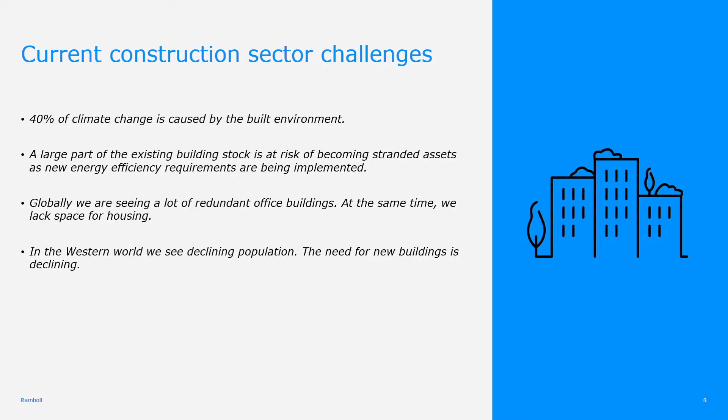We know that a large part of our existing building stock is at risk of becoming stranded assets. That's because there are new energy requirements. So if you are investing in a building that doesn't meet the new requirements, it might not be worth a lot in a few years. So that's why it's a stranded asset.

We also see that after COVID, there has been a lack of demand for new office space. People are working more from home, and in some parts of the world, in New York City for example, more than 20% of office space is vacant. So what do you do with all this vacant space?

And finally, we see that actually in most of the world, and especially in the western part of the world, population is declining. So that also means we should consider how many new buildings we actually need in the long run.

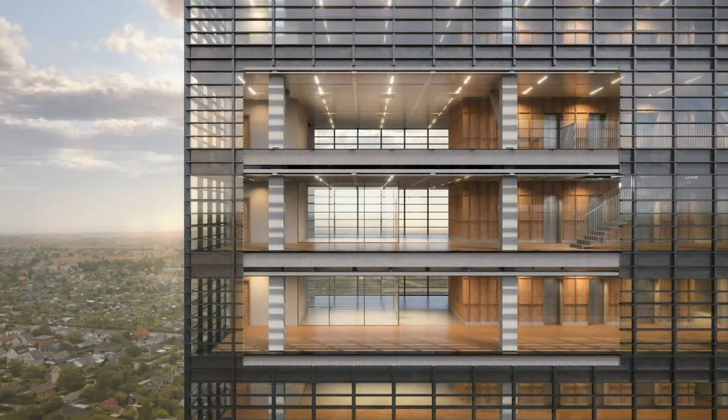We modernized all the surfaces, because after 20 years a building will be a little bit worn down. But then the other thing is the energy consumption. How do you do that? How do you track the carbon and make sure that you are on a net zero curve towards zero carbon?

The thing here is that basically you need the data. You need to understand how energy is used, where does energy go in the building? Because it's a relatively new building, we had all the data going back 20 years.

We harvested a lot of data, and we actually applied a lot of analysis. We had hundreds of things we could do based on the data to save energy, and we visualized all of these different energy consumers in the building, and at the end we came up with a few highlights.

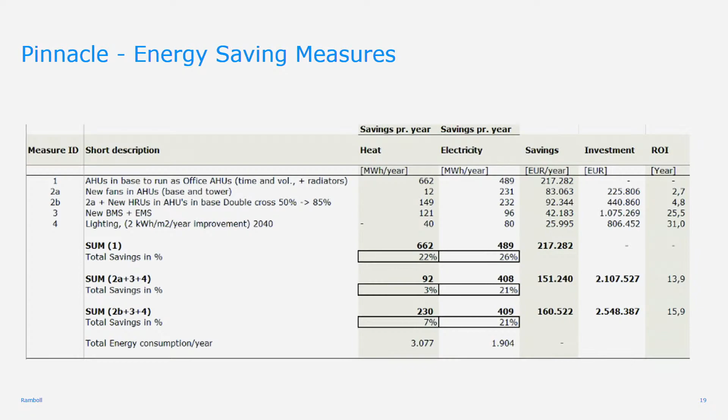These are the things you can do to save energy that can also be financially viable, which we presented as different options to the clients. And at the end, we came up with a plan to reduce the energy consumption by a third, so to 70% rather than 100%.

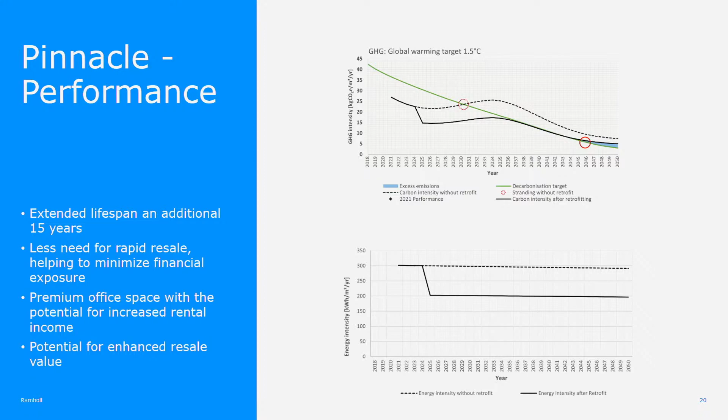We also showed the clients how they can minimize the CO2 emissions from the energy being spent, to stay below the CRREM curve and make sure the building does not become a stranded asset. A stranded asset is when the building doesn't meet regulation, so you won't be able to sell it, or sometimes rent it out to companies committed to, for example, science-based targets. This is a very important way to keep a building on the market and keep its value.

And again, it was viable, so it was paying off with these investments.

The other project I want to talk about is in London. Again, it's a building, called 8 Canada Square. It's a building from 2001, designed by Foster and Partners at the time.

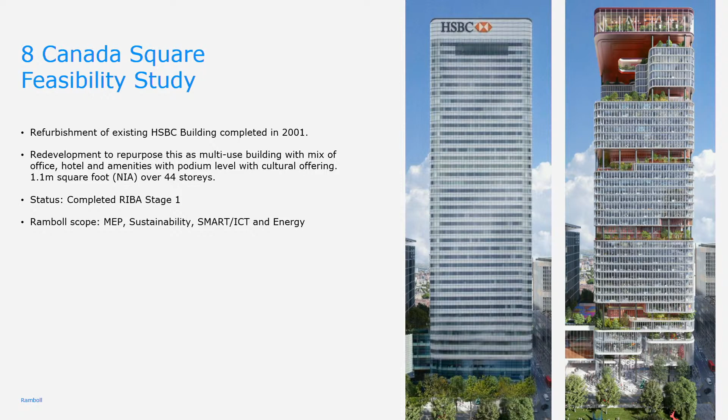And the problem here, again, is that HSBC moved out, or will move out of the building. They've been there for 20 years, but they found the building no longer meets modern requirements. They wanted to move to a new building, and they also took some of their staff from London to Birmingham. So what do you do when you have a building that seemingly is old-fashioned?

We were hired by the clients to do different things. First of all, we looked at what can be done to make sure the building meets the minimum energy efficiency standards applied to buildings in London. At the time, there was also a requirement to meet certain energy efficiency standards.

If you have an office building you want to rent out in London, you have to meet standard C by, I believe, 2028, and then B by 2030. Otherwise, you are not allowed to rent it out.

The other thing we did was, after defining a brief, the client ran an architecture competition, inviting architects to propose what could be done with this building. We acted as technical support and advised the client. When the architect was selected, the winner was KPF Architects, and they came up with concepts.

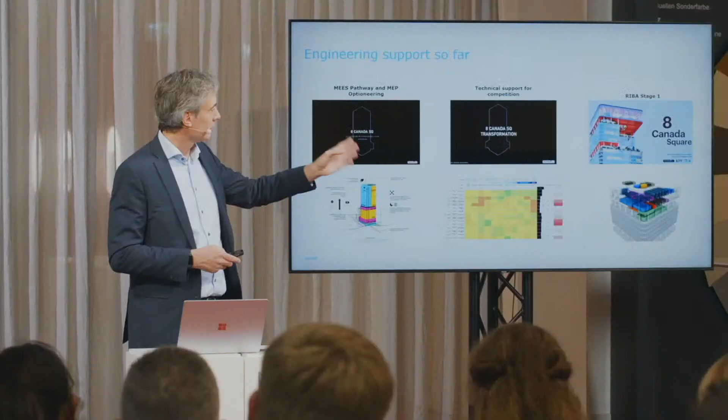We supported the architect and developed the RIBA Stage 1 report. The basic vision here was that there are hundreds of these buildings around the world, in New York first of all, but in all major cities. How can you transform these 20, 30, 40-year-old buildings into new, attractive assets?

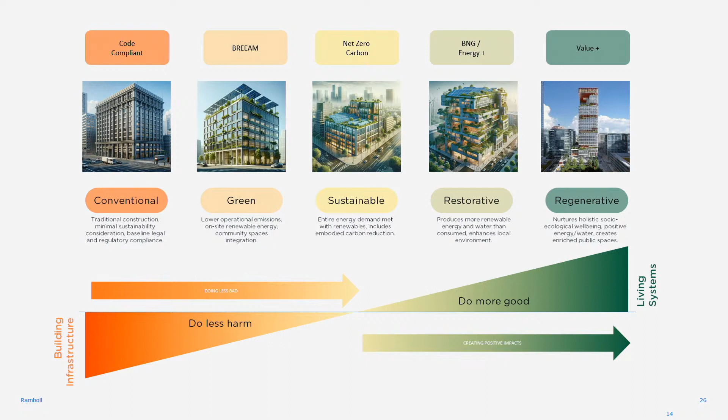What is the blueprint of a sustainable transformation? Our ambition, as in the curve you've probably seen before, is to go from conventional building methods to green, to sustainable, then to restorative or regenerative. So how can we move these buildings as much as possible towards not only sustainable but regenerative operations? That was the challenge, and we set very ambitious targets to improve on many of these goals from what they were before.

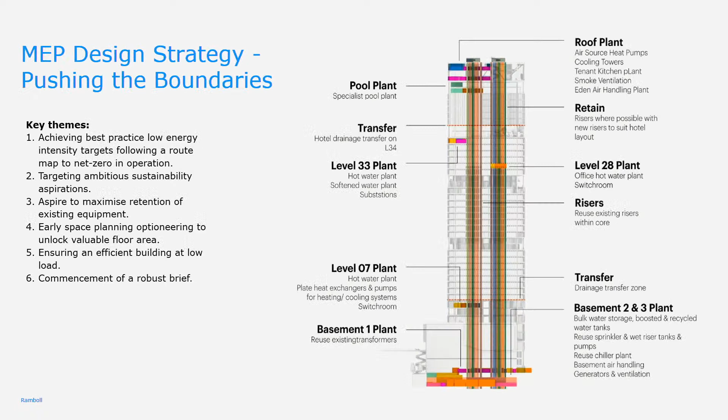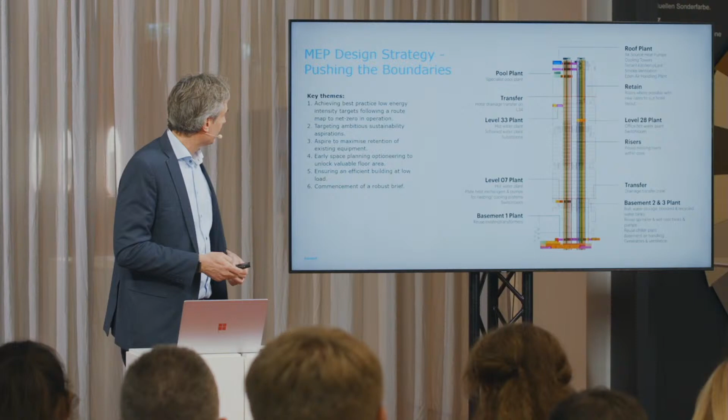We went through all of the things you can imagine and analyzed them. How can you achieve best practice energy intensity targets? We also took a look at the existing infrastructure, and the question is, of course, how much can you keep? How much has a lifetime for another 20 years, and how much do you need to replace?

All of that was combined into a report and a concept. For example, with the facades, we found out that we can keep the frames, but the glass panes need to change to improve energy efficiency. We don't have to change the frames—they can last for many more decades, and it would be too costly, also from a CO2 perspective, to change them. So in the end, a lot of things, including a lot of the mechanical and electrical systems, will be kept.

This is why one of the options we investigated, turning it all into housing, was not selected, because that would mean everything needed to be replaced except the structure. But we maintained a lot of it as offices, and the top part was turned into a hotel, making it mixed use.

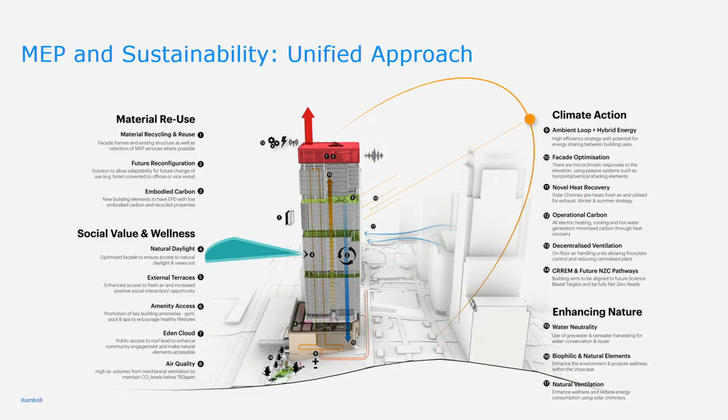We introduced these terraces so that people can go outside rather than stay inside a glass building the whole day, so they can go outside more easily. This also helps prolong the lifetime of existing buildings, making sure we don't have to demolish and build new, because that has too big an impact on the climate. Thank you very much.

Thank you very much, very interesting. What I think is special is that we now have phrases and words which didn't exist before, at least not in this context—stranded asset, transforming buildings. I think three, four, five years ago everybody was keen on building new buildings, and now we are talking about transforming buildings.

What would you say is the percentage in your building sector at Ramboll? I assume it is increasing, but is it a serious number already, and where's the end of the road?

It depends a little bit on the market, but there's definitely a lot more renovation and refurbishment at the moment than there was a few years ago, and I think everybody's considering maintaining buildings. I think the most radical example, or extreme, is in London. We've seen lots of new opportunities there in the last year, and maybe 80 to 90% of the projects that come out for tender are renovation projects—only a few new buildings come out here and there.

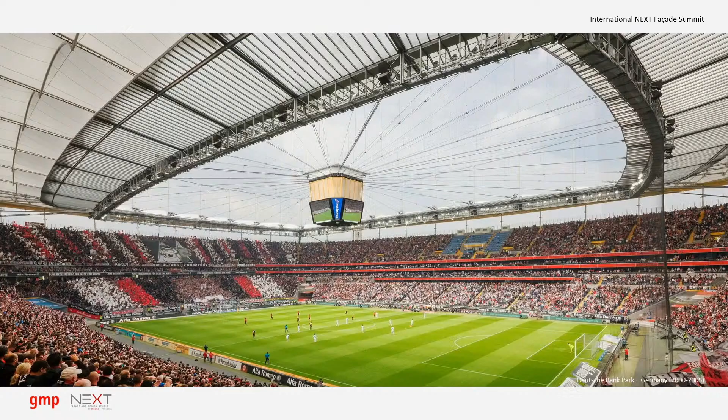We work all over the world. We have some offices in China as well. This is China National Museum, and this is two high-rise towers we did in Guangzhou. And another office we have is in Vietnam. This is Vietnam National Museum. Just as a brief introduction to what we do, we are now over 550 employees with 50 nationalities spread over 7 offices, and we've had the pleasure to have now 500 of the projects actually built.

Today I'm not going to explain other types of projects. I've been involved in sports architecture now for almost 15 years. This is a selection of the stadiums that we've been doing. Just to run you through a little bit, my passion and what I find so fascinating about stadiums is that they combine many different things: it's about personal memories of people who as kids went to see a match, but also a history of a culture, a history of a nation.

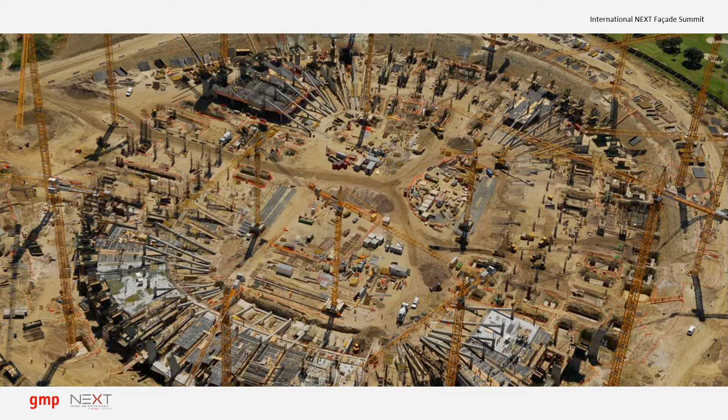Another part which is always kind of scary is seeing the real scale of stadiums when they start to be built. Because we work in a digital world with plans and screens, but once you go to construction sites and see 3,000, 4,000, 5,000 people building the things you've been working on, it's always a very impressive moment. The scale, size and complexity is always a combination of many people working together, usually from all over the world.

This is an image from the first stadium I worked on, in the middle of the Amazon rainforest in Manaus. Manaus was the host city chosen by the Brazilian government to represent that impressive rainforest. It's 1,200 kilometers upriver. The steel structure was fabricated and pre-assembled in Portugal, put on an ocean-worthy ship, and sailed straight up to the Amazon rainforest, where it was assembled. This was the final result.

The architecture represents a basket that local Indian communities use to go into the forest and collect fruits and everything they need. Of course, if the basket is the stadium, then the people inside are the fruit—but that's where the analogy ends.

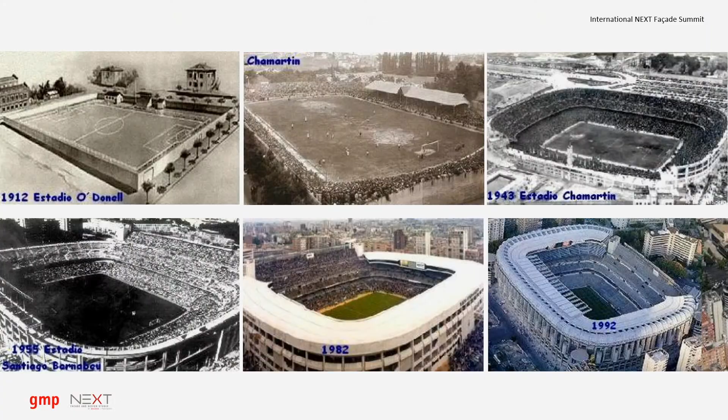Real Madrid started as a very small club more than 100 years ago, on the outskirts of Madrid. As the club grew, so did the city, and at some point the stadium ended up located on the main avenue, the financial district of Madrid. But the stadium no longer had the architectural feeling or design that matched a club that considers itself, perhaps objectively, one of the best clubs in the world.

The challenge for the design competition we won was to design a stadium in line with the ambition of the club, one that represents it as one of the best clubs ever in football history.

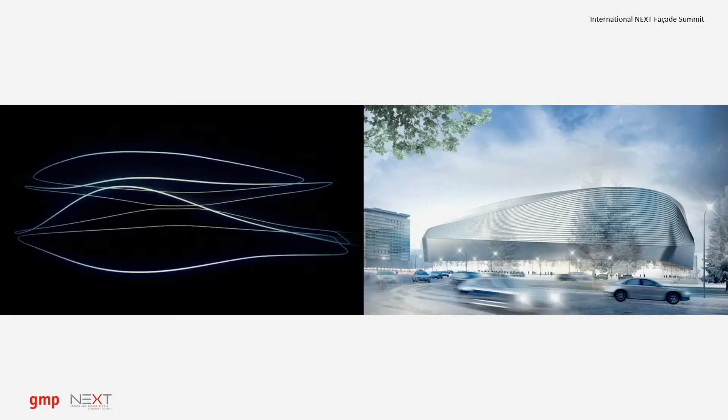We worked on this together with 2 local architecture firms in Spain. In all the stadiums we do, it's never just us—it's always an interaction between many different firms, especially local architects.

What we were able to do is not only transform the stadium but also transform the surroundings. We created public squares of around 12,000 square meters, which doesn't sound like a lot, but this is in the heart of Madrid—new public spaces directly linked because of the redesign of the stadium.

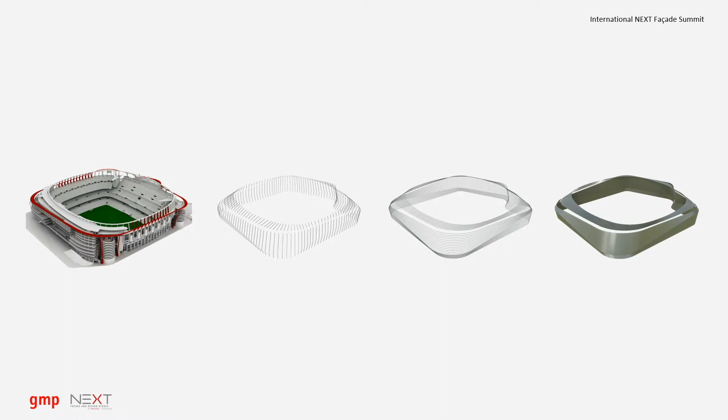There are around 100 vertical ribs hanging from those mega trusses, then 38 lines of horizontal elements going around that create this geometry. These are then cladded with stainless steel and aluminium panels, each with their own geometry. This was all developed in 3D and fully parameterized. Interestingly, we worked very closely with the industry, and they used the same models for fabrication as we had been developing for the design.

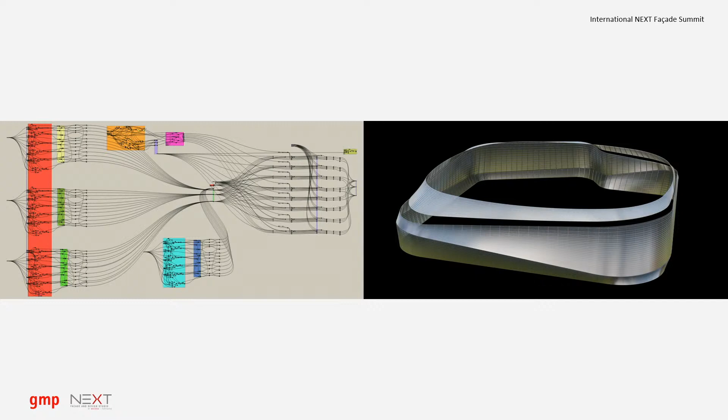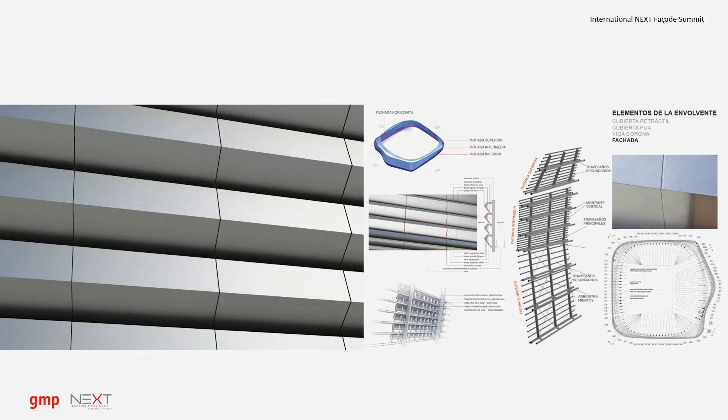And this is a close-up from the design documentation. So each of the louvers has two layers, let's say. One is facing slightly upwards, and one is facing slightly downwards. And that gives a really fantastic effect, because there's always one which is more illuminated than the other. This also helps to establish this three-dimensional view around the stadium.

During daytime, the upper parts reflect the skies, and they actually reflect the bluish tones or the beige tones of the buildings, and the lower parts are darker. At night, when the city lights up, the lower part lights up more and reflects more, and the upper part becomes darker.

They span more or less 4 meters, and they vary in height—sometimes 60 centimeters high, sometimes 1.20 meters.

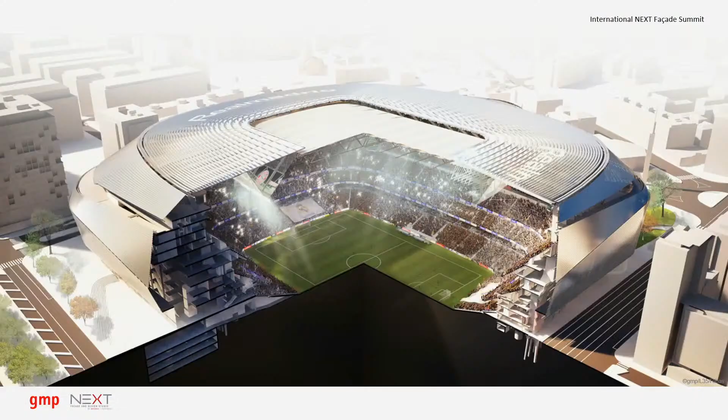And this creates actually 2 different types of spaces that are added to the stadium, which the club didn't have before. One is a space in between the old concrete structure with the tiers and this new element, which we use for bars, for lounges, for skyboxes. There is a museum inside that is part of the tour, and there is a shopping mall inside, and all of these elements are directly related to the space that the stadium occupies in relation to the city.

So the museum is on the main entrance side, which is here, Castellana. The shopping mall is on the back side, where the old shopping mall used to be, etc.

The second space, which is very fascinating, is this sort of slit which you see running on top. This is what we call the skywalk, and it will be part of the stadium tours, and also different kinds of events can be held there.

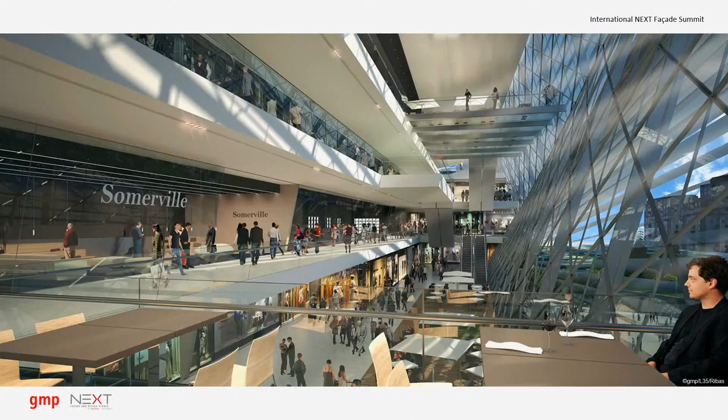You have a fantastic view over the city, because it's really, really high up—you can also see the pitch, so it's a very fascinating space, which now the club is using actively. This is an image during the early design stages of how this space between the new facade and the old building can be used for different types of elements.

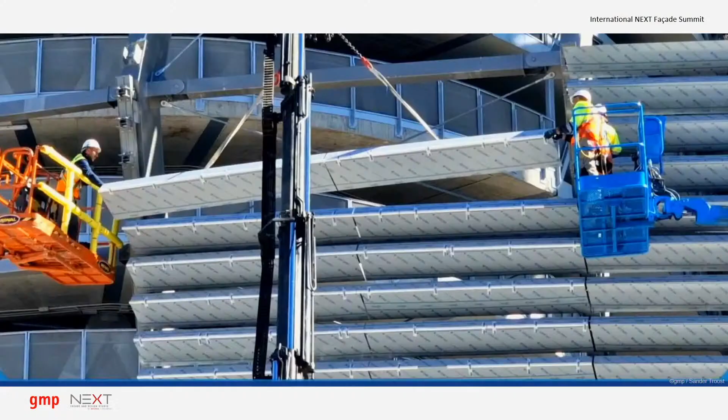Again, each individual louver is a singular piece. They were all prefabricated in the north of Spain, and they came in sequence to the construction site. So the level of precision needed to be absolutely accurate, and this is what we did together again with the industry, the construction firm, and everybody involved, because there's no single element the same. So they needed to be there in time, accompanying the construction sequence. And the material is stainless steel.

It's a linen milled element, and this gives the tones, the different colors that the stadium has, based on what the stadium reflects to a certain extent. There was massive research done by our team to find the right material with the right level of reflection, the right intensity, the right tone, seeing the stadium reflecting the city and interacting in that way. Those louvers are sometimes more open when there's a visual connection to the city, sometimes more closed to protect either the stadium or the surroundings from each other. So they create this display, but the color, the material, the texture was extremely important, and the whole design is based on those premises.

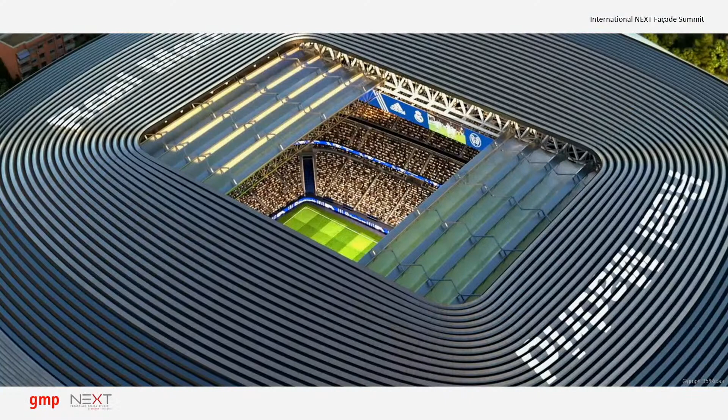Of course, the best club in the world, the best stadium in the world. So we have a retractable roof which can cover the pitch, and this also allows for other types of events. We thought they would use it more for concerts and other events, but now they ask UEFA if they can close the roof because the sound inside gets so much more intense. So for the most critical matches, they try to convince people to close the roof to support the team to win their matches.

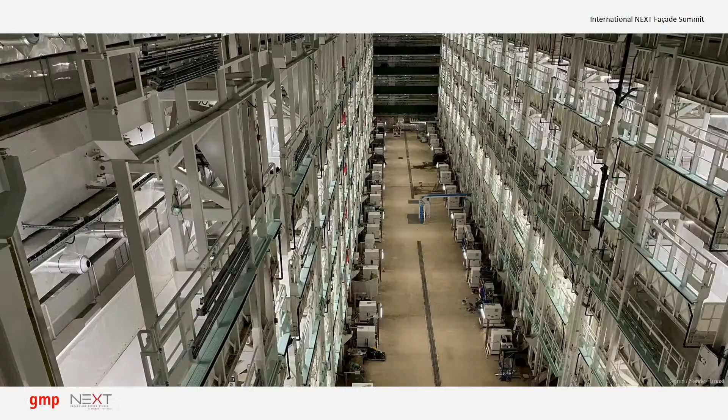Retractable pitches are nothing new in stadium design, many stadiums have them - Gelsenkirchen, Schalke has a retractable pitch. The interesting part here is there's no space to transport the pitch to. So what the club decided is to intersect the pitch into 7 segments, and they all go down around 40 meters deep into an underground parking level. Each pitch element spans around 100 meters because they couldn't use the short side - there's actually a metro running right below the field of play. So this is around 100 meters in length, what you see here.

Every pitch element has the full infrastructure for the grass of the element below to grow - grow lights, irrigation, ventilation. Ventilation is the most critical part for pitches to grow. The philosophy, and it's actually true, is that in this condition you can perfectly control the whole environment. If pitches are outside in stadiums, it's always very difficult because there's a lot of shadow, not a lot of sun, and you need grow lights anyway. So the vision here is, let's make a greenhouse. I'm from the Netherlands, we grow tomatoes in greenhouses - I know here in Germany those tomatoes aren't considered the best tasting ones, but they grow. So the idea is you could use the same technology for the grass, and that's what they did.

The stadium now is really a multifunctional arena. Before it was mainly football, now it also hosts concerts - Taylor Swift was there earlier this year. This also proposes a very nice challenge to stadiums in general because the public is completely different. A football match has a certain demographic cross-section; if you invite Taylor Swift, the public is completely different. You need to cater for that in terms of toilets, food and beverages, safety, access, etc. So we were very happy to see this is now really happening and taking place, and of course for the club this is also a great way to generate extra revenue.

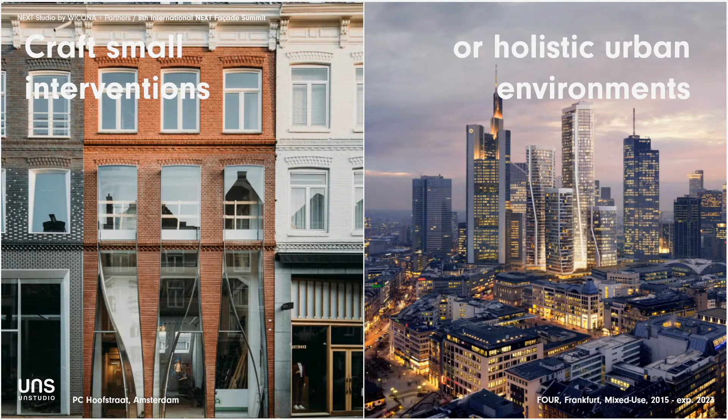Thinking about the life cycle of buildings and what buildings can mean in the future, we always try to anticipate what the legacy will be, looking back. How is the future looking at us being here today? We have seen examples extending the lifespan of a stadium by many years, but if we discuss a lifespan of 20 years for a building, that's quite ridiculous. There have been mistakes made in the past, which we now try to avoid.

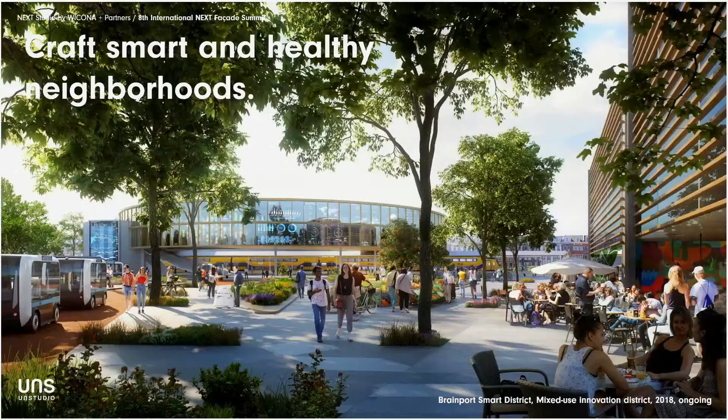So we think in terms of healthy, smart neighborhoods. How can we really bring things together? How can we share the knowledge and benefit of this together? Really focusing on communities and also looking at other possibilities out of the box.

So what am I going to show today? I brought three projects: the tall one, the large one—which is a large inner city development for Amsterdam, the Booking.com campus—and last but not least, the small one, which is the Echo project at TU Delft.

My Portuguese is really bad, Sander, so maybe you want to correct me, but it's called Parque da Cidade. I don't know if that's okay, but let's call it PDC for now. Maybe that's easier.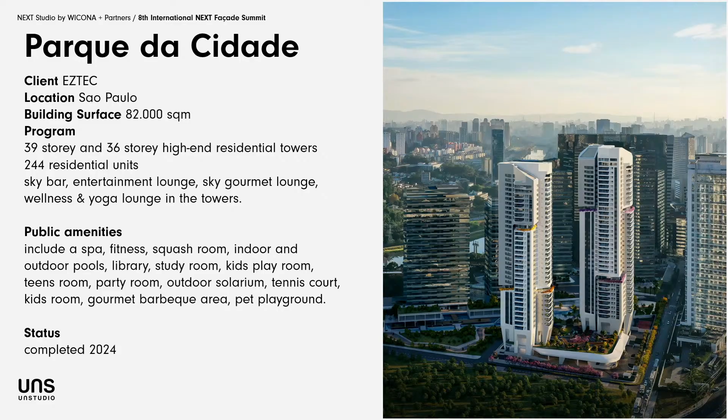So it's a residential project in Sao Paulo, about 82,000 square meters, with 2 high-rises, whereby the amenity level introduced in this development is about 30%. So 30% of the overall area is dedicated to private, semi-private and public amenities—meaning what you, Lars, have introduced on the HSBC tower.

This is something we already try to implement into this typology, because it's right—if you think about a high-rise in a very conventional, traditional typology, it comes with certain challenges in the way people are now using it, living in it, working in it. So it shows also in your example that this is really something needed.

You need to provide areas which are not just bringing the profit in, but also contributing to the social cohesion, to the neighborhood feeling, and so forth. So there's a big focus on this, but also on how it's integrated into the urban context, the public amenities. How can you really connect to the tissue around these buildings? Because every building is one small part of something bigger, or something in the sense of how we live together.

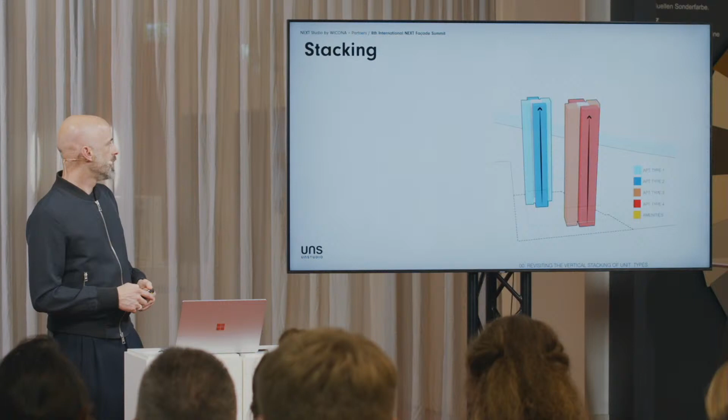So conventionally, there was a unit type mix, which if you would just extrude it, would kind of build or generate probably like every second high-rise looking in Sao Paulo. So there's this particular mix of units that in the next step we try to kind of twist around, to almost develop equal qualities for the different unit types.

And then we had this kind of nudge move, where we take things apart and establish these kind of special amenity areas for the residents. The trick here is something that we already learned, I think, 15, 20 years ago. Christian Bergmann will remember that when I started at UNStudio, I had the pleasure to work together with Christian on a development in Singapore.

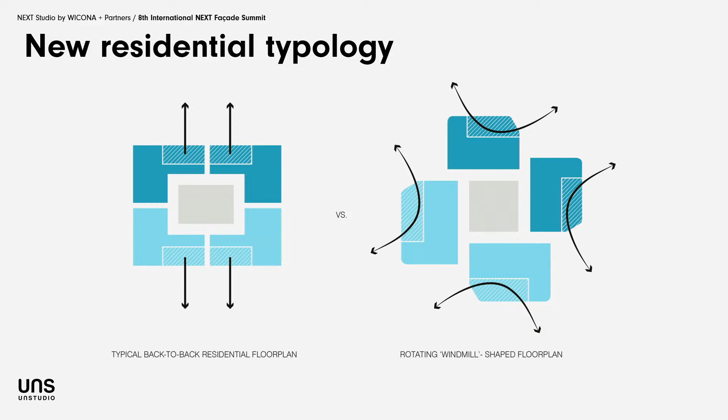Which kind of had a similar logic integrated into this. What does it do? It's quite simple: the way you spin the apartment blocks around the core, which every high-rise obviously needs, the way you distance it, you orient the apartment types - you can get quite some benefits out of this.

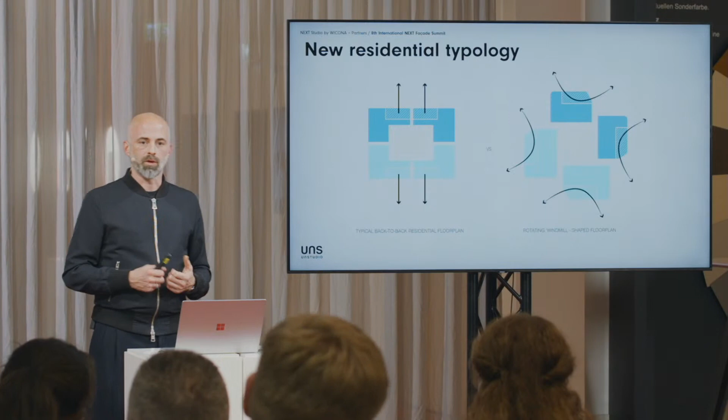You have more equal ways of enjoying the view from your apartment, but also, especially in these warmer areas of our planet, you have the possibility to allow for natural ventilation going through, compared to the left side, where you always have a back side of your apartments with no windows, no way of getting air in. You can see this from the diagram, how it manifests into the constructed structure, and it also has quite an impact on how the tower is articulated.

To zoom in on these semi-private public balconies, this is really where additional functions for the residents of the building are integrated. It builds this kind of little neighborhood plaza, a place where you can celebrate the birthday of your kids. It's an amenity that really contributes to the typology of high-rise in terms of residential use.

Important - like with a pizza, if the dough is not good, you can forget about the pizza, it doesn't matter what you put on top of it. It's the same with these high-rise developments - you need to think about how it embeds, what is the access, the additional use, is it public or private?

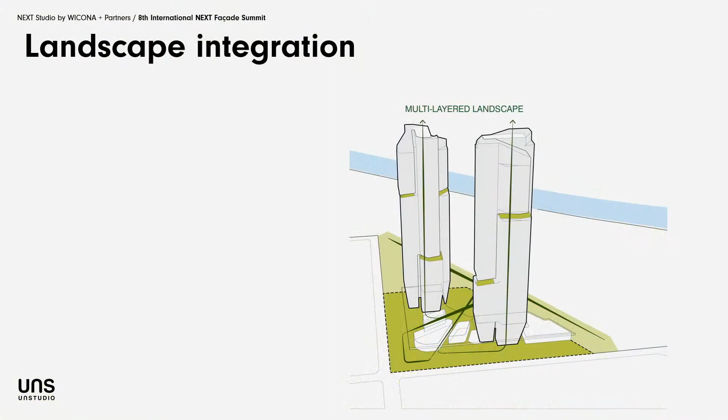There is this park which is pulled into the site development, and it builds - sorry to be so fast - it references a sort of public landscape thought of as pavilions in the park. The view from below also gives you another view on the quality from the sky lounges.

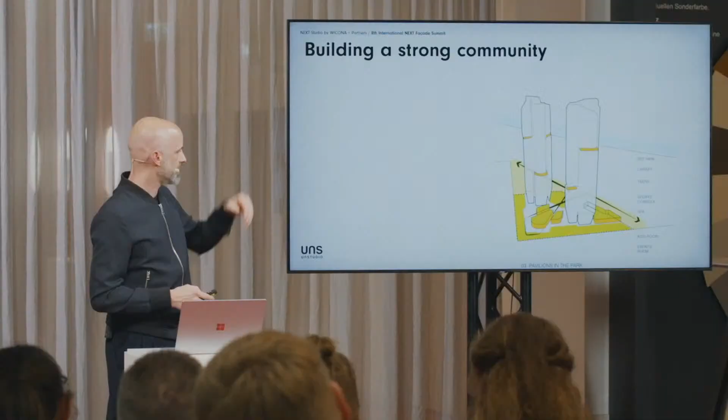Getting back to building the strong community - this is where we see a horizontal integration of the high-rise into this development and into the context, but it also has a third dimension, connected to the sky lobbies or sky lounges on other levels. Just a view down onto the podium - there is this connecting, linking element, housing all the public and private amenities.

Think of yoga, spa, wellness, sports activities, but also a lot of landscape and green features, because - maybe Sander can confirm this - in Sao Paulo, or generally in Brazil, there is a strong need for outdoor living, outdoor enjoying, meeting, cooking, and anything you can imagine.

So that was quite important for the design - we have something we always try to implement: it's not like you throw technology at it and it solves your problems, but first you start from very passive design strategies.

Of course we pushed on that kind of greenification around the site. In Germany you mostly have the conversation about whether you need to cut an old tree away if you want to build something new. Here it was more about how much more green you can actually bring onto the site.

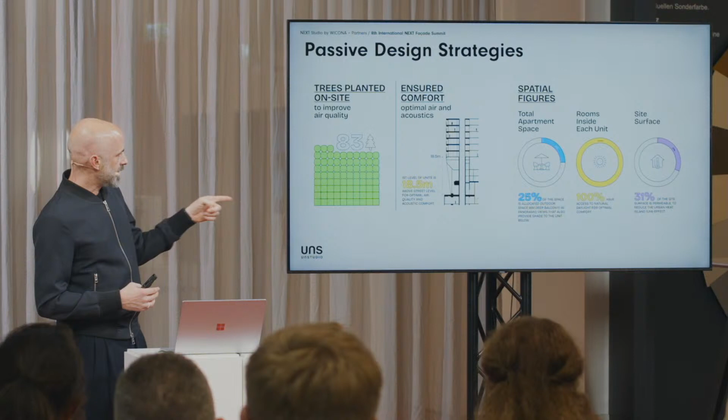There's a high comfort level, and when it comes to the benefits of how we've laid out the apartment types, there's a lot of space allocated with deep, big balconies. Every individual user has their own balcony, then they can go to a common shared balcony, but they can also enjoy the landscape. This idea of outdoor living is deeply embedded into the design.

Natural daylight, of course, very important. I showed you there's no backside, so you can enjoy this all the way around. There's generally a very permeable way we have designed and structured it.

There was a very strong focus - it's always also very dependent on your client, how far you can really push on these topics. This was a very good client in that they were really supporting a very sustainable approach, starting from the embodied footprint - the way the cement, the concrete was mixed, was a very hybridized way.

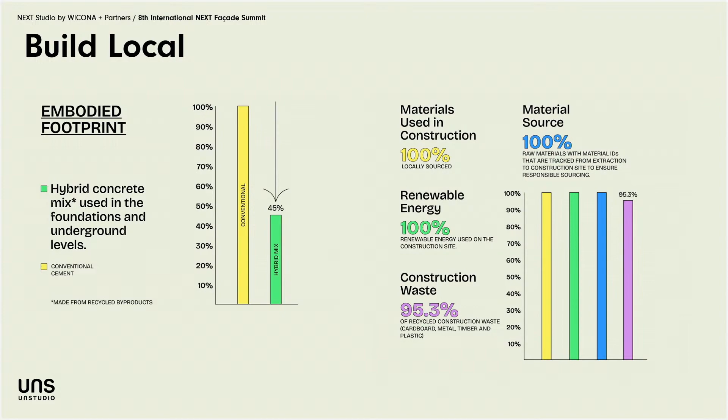There is local sourcing, renewable energies, the way construction waste has been dealt with, and last but not least, something very complex when you think about supply chains: material sourcing done 100% all the way to where it comes from. So we were quite aware of where the materials we've been using come from.

Also on operational, this is always something we need to consider. It's not just that you put something there and look at your most minimal use for generation of CO2. You also need to think beyond that - okay, across a lifespan of so many years, what can you really do about the operational aspect.

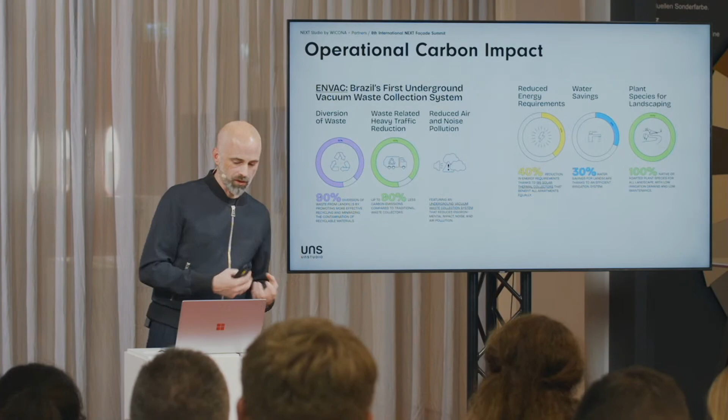There are many different aspects of what you can do. I think we hit really good numbers in how we reduce energy, but also simple things like water savings - we know the scarcity of that very essential element.

So all in all, very good metrics for something we developed in Sao Paulo. We were quite happy with our first project in South America in this framework with that client - it took just about 10 years to get here, also through Corona, and we delivered it this year and everybody is very happy about it.

I will move to the next one, which is my large size building, the Booking.com campus in Amsterdam, central Amsterdam. Booking.com is located on the Oosterdoks Island, really in the center of Amsterdam.

Up here you actually have the central station, and this is an image from the 70s, I think, where it still has been used as the mail distribution center of Amsterdam, called Post CS. In 2005 it looked like this - you can also see in the back the central station. So it was really like flattened out.

I think at that time, the old post distribution center, which probably people who visited Amsterdam around that time remember, was really an institutional building because it also housed the Stedelijk Museum. There was the very popular Club 11 on the 11th floor, and many creative people working in there. So it kind of had a really special meaning in the development of Amsterdam's inner city.

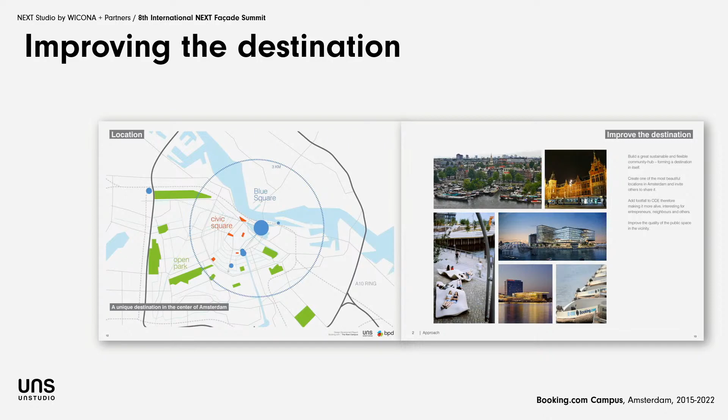By participating in a competition, and that was the start of something I had not experienced until that point, because we were very early at the table, and we were able to really get to know Booking.com and try to understand what we needed to develop for them.

One thing was, of course, because it's so central, Booking has the policy: we don't like to go with a car to our office, we don't like to come from far or go out to the countryside, we don't want to be outside somewhere, we want to be right in the middle. Most of our employees come to the central station by public transport, and then they want to get there. So they needed something really central, something really big.

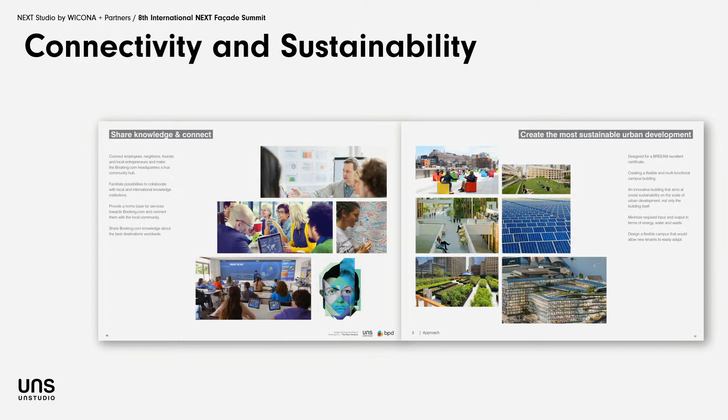Like a destination, a new destination for them. Then, of course, the ambition to create something that is very much top-notch in terms of work environment. How can we bring all these different cultures and their employees together? How can we connect it and also make it one of the most sustainable developments?

How we started this, we first needed to understand their spirit. Booking themselves created a spirit team, which is something I hadn't experienced until then. This was really about understanding themselves and getting into a dialogue with an architect to build a framework around what they really would need for the future. We heard a lot, 'we don't know what we need in 5 to 10 years, we don't know this, we don't know that.' So it was really a long dialogue process, super interesting.

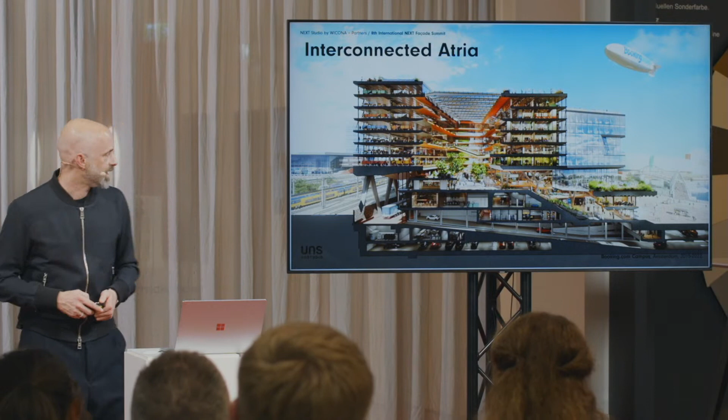In the next step, we translated this into very tangible ingredients that we could apply on an architectural level. So it's this kind of all-connecting building that we always imagined. If you look at this spot where we built about 72,000 square meters above ground for about 3,500 to 4,000 employees, it's a massive, dense development. We needed to find a way, if you pack all this on site, how can we really break this open? We introduced two big atria whereby the working floors are 80 meters deep, or 20 meters, I'm not sure anymore. But there's a lot that needs to be packed into that, and you can see how it connects through these atria.

Booking is a very vibrant company, they have many different cultures. So it needed to do everything without being gadgety in a way—not this kind of foosball table and climbing wall. They also got a climbing wall, but we really needed to dig deep.

What was the main focus for us was really the three aspects of health: we always talk about psychological health, the social health that you experience in a work environment, and the physical health, of course. So there was a very clear ambition that it needs to be the most healthy work environment.

I'd like to go along a couple of aspects so you understand how we translated this into architecture. Think about these different aspects that would impact your condition as an employee or user of the building. It was a lot about the human experience, thinking about the community, departing from this spirit that Booking wants to live in their new environment, but also thinking about physical movement.

Then daylight, very important with the density. How can we really break things open? How can we connect things? Not that people disappear into a core to take the elevator, but how can we stimulate this community aspect, so that people meet and even work in the open space and enjoy it. So movement, very important. Daylight.

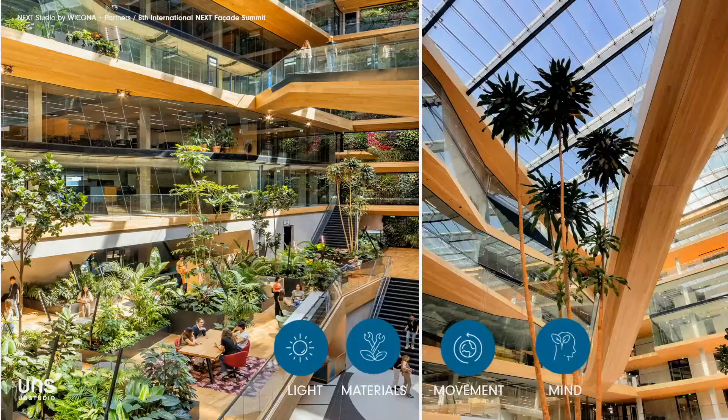But also the biophilic approach—I think there are more than 10,000 plants integrated into the building. So it's really true green, not something made from plastic. It also really contributes, because everybody knows the presence of green already increases your ability, the way you produce and do work.

But also on the technical side—all that aside, it's nice to talk about culture and spirit, but you also need to make a building that came with sky-high requirements, thinking about the location of the building. I was mainly responsible back then for developing the different facade types, and one of the main challenges was whether we needed triple or quadruple glazing to fulfill the acoustic requirements. But there was, of course, much more to it, and it's an integral system where you need to bring all the loose ends together, so there is high thermal comfort because the whole system is water-based.

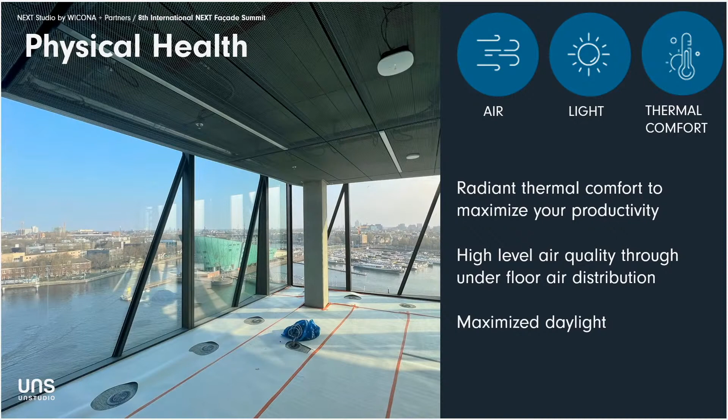You can see these kind of very open ceilings where you also have the radiators integrated. The funny thing is, it's something you cannot really do in Germany—we have the entire building equipped with a plenum ventilation system. So there are no ventilation ducts in the ceiling here; the entire floor is one big duct. Then you have these kind of openings, which you see more often in all the pictures, where the air is basically brought in from the floor.

So the fresh air comes from the bottom up. I get to this because in the next building it's also integrated like that. Just to wrap that up, really the biophilic approach and this kind of the bridges, working balconies, everything that kind of really stimulates - you cannot hide away, you are in the open, and people really enjoy this aspect. This was really nice because this was a big part of our team.

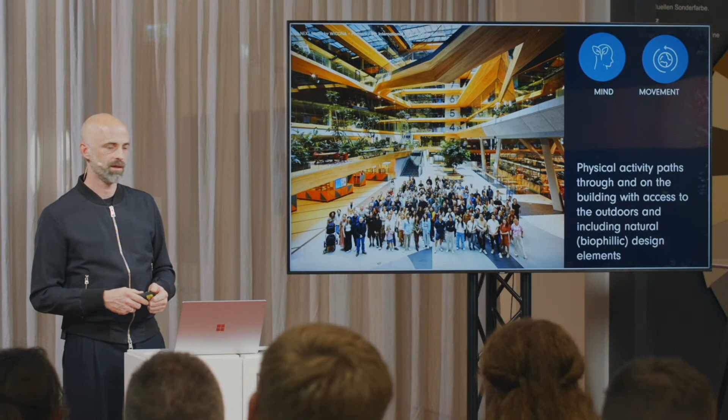Actually, all of them who also have contributed to this building. And then I spoke to the responsible person if they have an overview of how many people actually are needed to work on a building like this. He said to me that about over 10,000 people have been contributing to the design and also the construction and the process of this building.

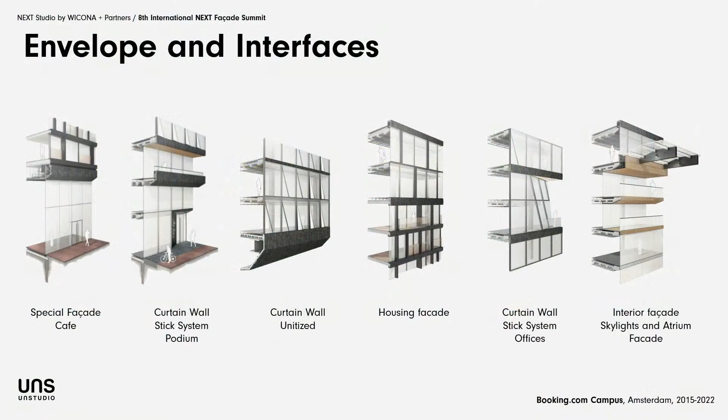So quickly, vision and reality. I think we did quite well. There's also a residential part to it because it's BPD. They needed to also have their 42 residential units. Let me just skip to that.

And this would be the view from the east view where we have a very intricate kind of facade also. I have to say the facade is an element facade which has some special corners. We have been really sourcing this through many facade suppliers, so we ended up with Permasteelisa, Scheldebouw, who helped us to really develop this. But we also spoke to Schüco, and we spoke to Reynaers, and so it was very interesting to also develop this on the go with the industry partners.

So a true connector, kind of the final closing piece, amazing roof terraces, and as you see here, this volume is actually resembling the old Post-CS tower that I have been showing in the beginning, with the club and the Stedelijk Museum back then. And for some time we also have been discussing whether they want to have a public club on top, the new Club 11, because it has a great view, but they decided against it because they want to use it all for themselves.

So last but not least, I want to move to the small building of 10,000 square meters, which probably Uli knows quite well, which is also a building which stands for a really, really interesting learning process. Because if you work with an architectural faculty, you have to deal with a lot of expectations when you receive a design brief. So if you would have just read the brief and the performance, everything the building should have been doing, it would basically be a shoebox with small windows.

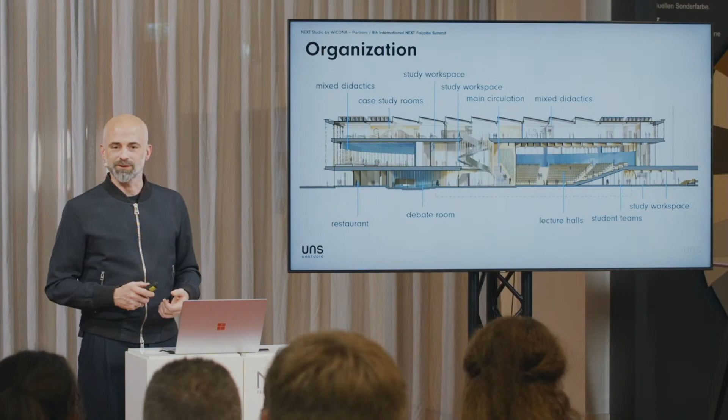So it's a kind of 3-story building with a central atrium, central entrance. There are various functions in there, mainly also study space, but also big flexible lecture halls, or one big lecture hall that you can subdivide also. So it's this kind of interdisciplinary building where several faculties can make use of it. And Uli, you correct me if I'm wrong, but I think the students very much enjoy this building. Okay, thumbs up.

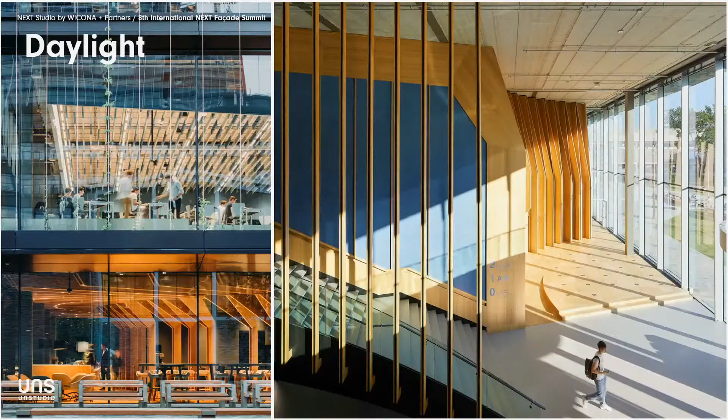So here another visual of that. The lecture hall in itself is a kind of radial, a half circle layout, which is really also you can separate it. One thing that is really striking in this building is, of course, the amount of glass that we were able to wrap around. And we spent really a lot of time developing this because our main focus was to bring as much daylight into the building for the students to enjoy.

So big focus on the envelope. How can we integrate green? You see the building, the users are very much sitting in their own context, which was a very essential aspect, but also really getting into the engineering of the frameless glass. How can we really do this? This is something where our heart really starts beating when we have the opportunity to do something like this.

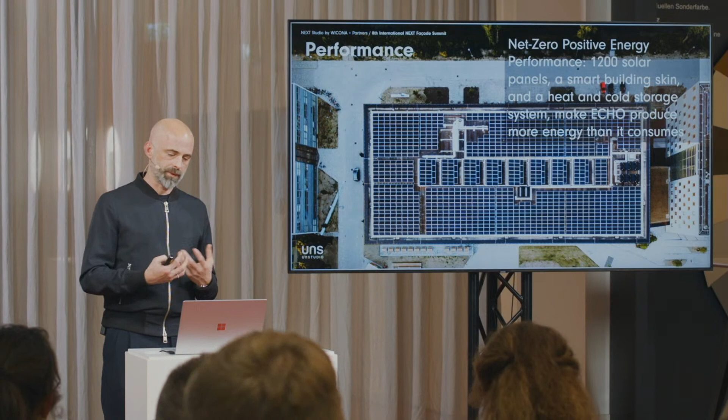So you see, there's a big influence on the building provided by the context because of the visibility, the transparency. But the way we kind of then also got the performance right was, of course, by implementing a lot of, or spending a lot of time, how can we really make this the most sustainable building as well?

So there's a lot of PV integrated on the roof, as you can see on this image, but it also has a very smart building skin. There's a geothermal storage of heat and cold, something that is also much easier to implement in the Netherlands than getting permitted in Germany. And so bottom line is that the building actually produces more energy than it uses, which was for us back then really a major achievement, departing from that initial brief.

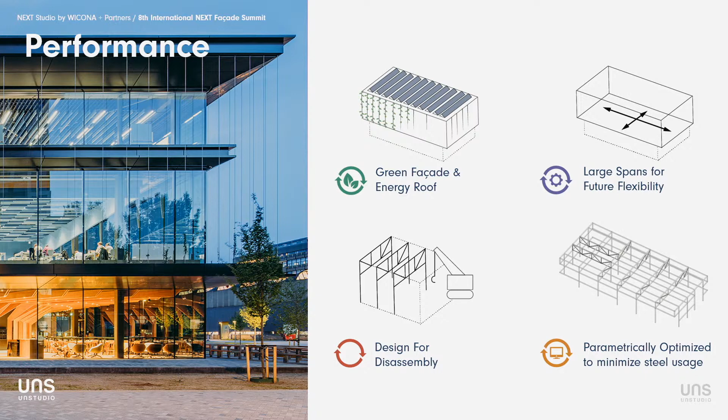So what does it do on a structural ability? There are, of course, the facade and the energy roof and what it does, but also the way the primary structure is laid out. We have been working together with Arup, with Matthew, on this. So it's really this kind of integrated approach of disassembly. It's a steel structure with big frames that you can, at some point in time, hopefully take apart and move somewhere else or do something with it.

And what does it do on a technical level? I showed it before, we always try to have more passive strategies first, but then also really dive deep on technical innovation and how can we really kind of push this to the next level. So I have been explaining already the ductless system in the floor plenum on the booking.com project, which we also applied here.

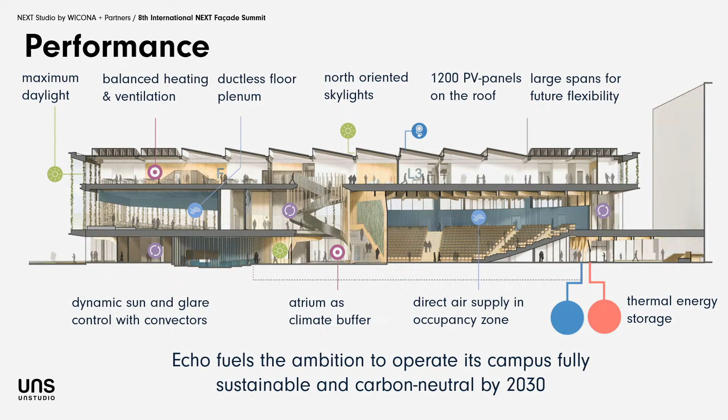So again, no ducting whatsoever. You can just take that container for air supply, take it from here, put it somewhere else, or you need to have a meeting room, you need to do something. So it offers a lot of flexibility. The atrium is this buffer space. There's a balanced heating cooling system, so it's not just that it's constantly using the full energy and so forth.

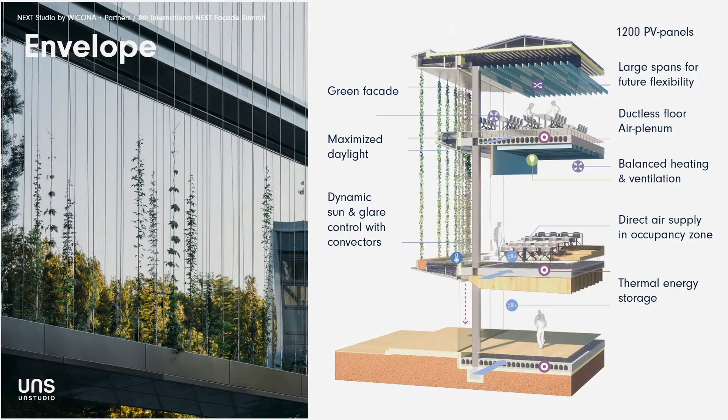On the envelope, we have these integrated strings, which are supposed to provide green also growing on the building itself. You can see these deeper cantilevering floor edges, which also provide sort of shading or reduce the heat gain. So all in all, a couple of very simple ingredients that really help to make this one of the most sustainable buildings so far that we were able to produce.

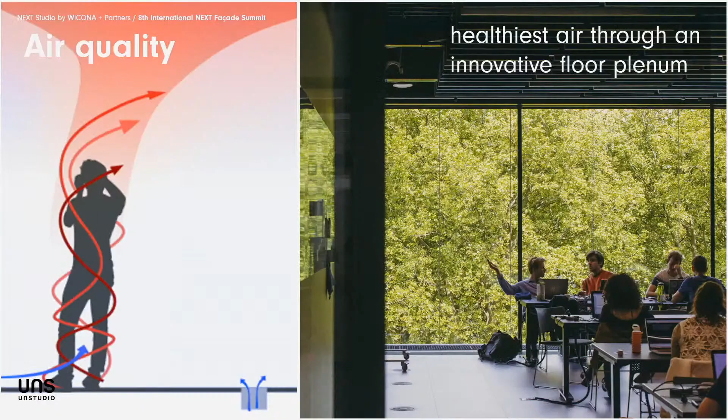And this is one of the last slides, then I will also be done. This is again getting to the principle of the ductless ventilation. You need to imagine it that the floor is a duct, and then the air is being pushed in, meaning the clean air is the closest to the user. Usually you throw in air from the top, where it mixes with, let's say, polluted, dirty air in your direct proximity. In this way, the air is then extracted from the ceiling, so there is this kind of natural flow of air coming up. So this would also really provide very healthy air because it's one of the most difficult things to tackle - air quality indoors.

If you speak to companies who develop filter systems for indoor air, this is one of the biggest challenges. So I think it's of course challenging on the implementation, and in Germany you would not get this through the regulation. So I'm very happy that in the Netherlands we were already able to apply this to two buildings as a principle.

The whole building is, or not the whole building, but large portions of the building is also circular. So thinking along in this kind of the idea of the disassembly, but also bringing in recycled products. So it's demountable, but there's a lot of bio-based and recycled material properties.

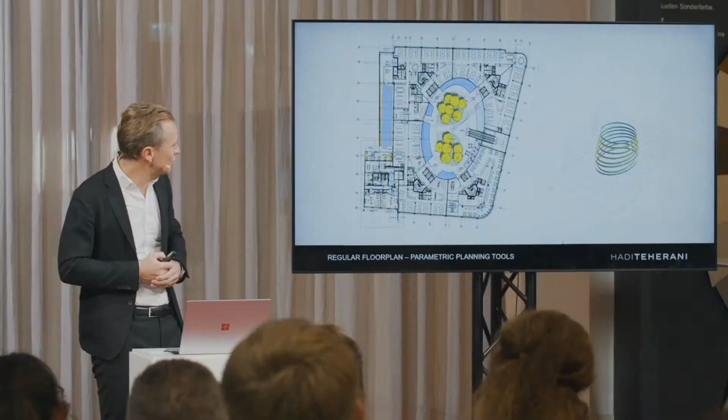What we did is, imagining the outside is almost a rectangle, we started to play with courtyards, as you usually do, and in the end found the most efficient way would be to create an ellipsis on the inside. Because this creates deeper spaces on four corners, and you can nicely integrate the cores and all the areas that don't necessarily need daylight into the four corners, creating the ellipsis on the inside.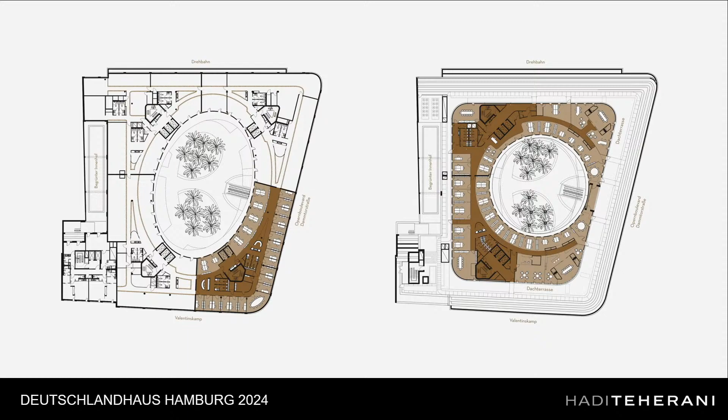This is how the floor plans look. On the left, you see it's a very efficient and flexible way of renting out the spaces. You always have about 400 square meter units per core, and you can connect all of them, with a nice circulation area all around. You're also able to have up to 9 different tenants per floor, so all of the flexibility for the next decades, and for renting or lending out spaces, would be there.

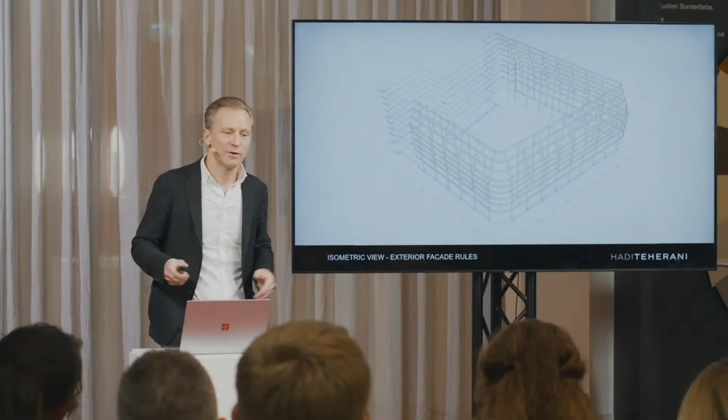A quick dive through our parametric models, how to organize this. You see those four shear walls, which are also the separation of the units and the fire protection walls, then the setbacks from the outside. The setbacks from the outside create certain issues on the inside, because you want perfect, flexible, nice working spaces, but the floor plans always become more narrow towards the inside.

That's how we started to design that the atrium is not just an ellipsis going boringly all the way up, but the atrium basically does the same thing in section. As the building facade on the outside sets back, we are cantilevering the atrium to the inside.

You see when you looked up during the construction site that you're starting with a 52-meter wide ellipsis on the first floor, and you're ending with a 32-meter perfect circle on the top.

You see that none of these ellipses is the same. They all seem to be moving against each other. We are creating internal balconies which are up to 3 meters deep, sometimes only 50 centimeters, in order to still be able to clean the glass.

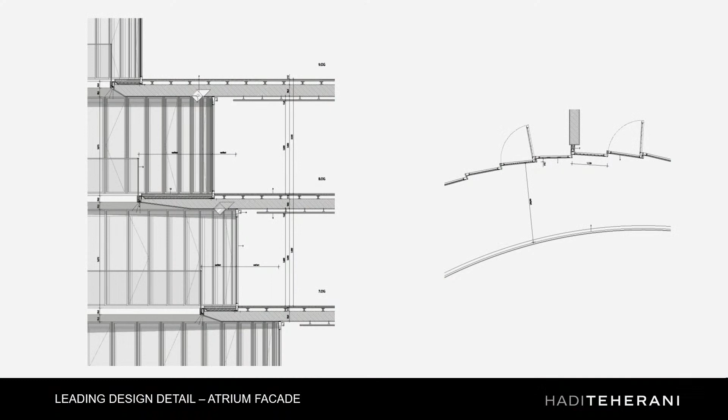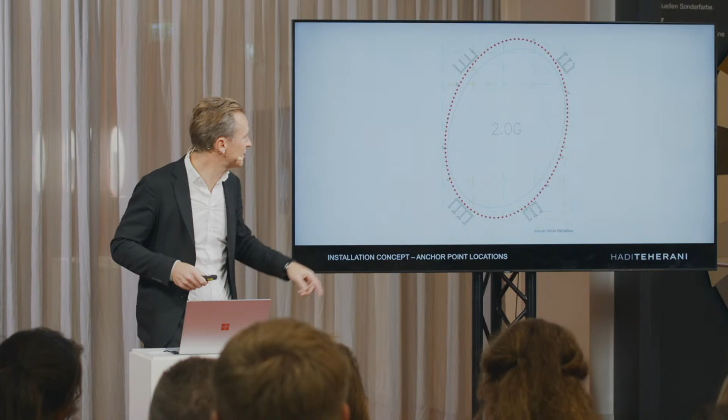That's an early section. During the competition already, we were thinking about how to design it in a way that it's so strong that it lasts through all of the debating, all of the cost topics and so on. You see an overlay of all of the different facades on the inside. This is another overlay where you see with the red dots the actual facade on the inside, and with the blue line on the same floor, the balcony outline.

So we came up with these facade elements which are plain, which are straight, but then, because we are at the fish market where our office is, they almost look like a fish skin, they turn around. That was a design feature that, going into detail with our consultants, gave us a really strong design which adds to the atmosphere of the space, but also made it possible to create all of these different radii of ellipses with one single element and one single opening door. So we have two different elements, but everything seems to be different.

Just because we wanted to add a little bit on top, on every second floor the direction of this facade is changing. So once it's going to the left, then to the right, then to the left. These are the little things you notice when you're there. That's a view up.

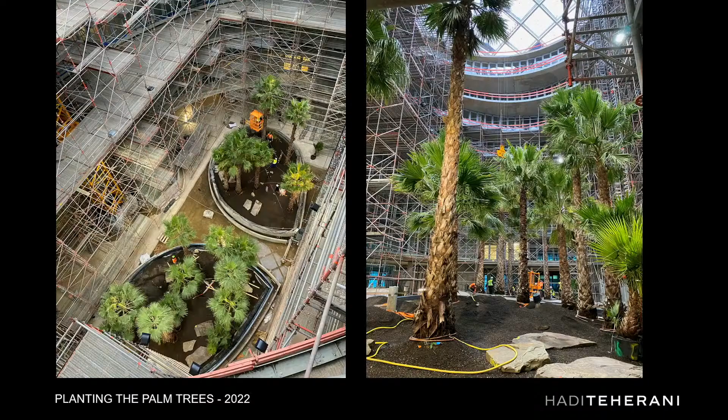This was the day when the palm trees were brought there. They spent some time in the Netherlands in between. They're from Valencia originally, spent one year in the Netherlands, and from there were transported. They were taken by a big mobile crane on top of the building.

The reason I was showing this image is also because roughly 5 years earlier we had to design the roof, and we had to decide the size of the steel structure. It had to be done in a way that, in the end we did 3 meters, so that you were able to get the roots of each palm tree perfectly from the top through these elements.

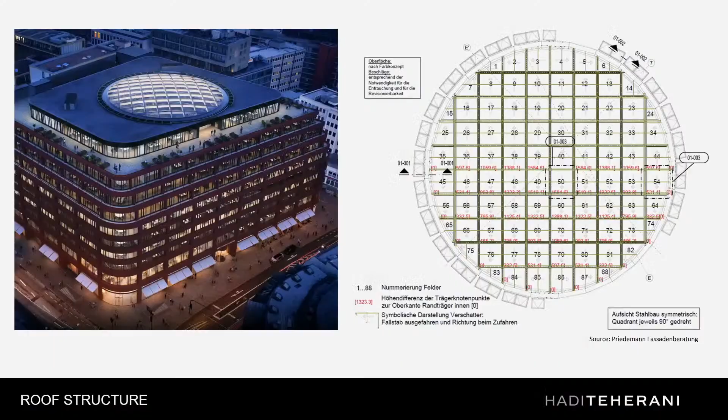Talking about the facade, this was the internal atrium facade, and on the outside we worked with these vertical handmade stones. We have the setback floors. We went through lots of mock-ups, lots of discussions with the city officials as well, one-to-one mock-ups. We wanted the corner to be perfect.

We wanted, of course, the upstand and the downstand perfect. We didn't want to have any joints anywhere, so there were formed pieces going around the corners. We also parametrically designed a pattern which makes it look like it's not designed, but arbitrary. But of course, you have to design it in a way so that you can really manufacture it economically. That's one of the mock-ups we did.

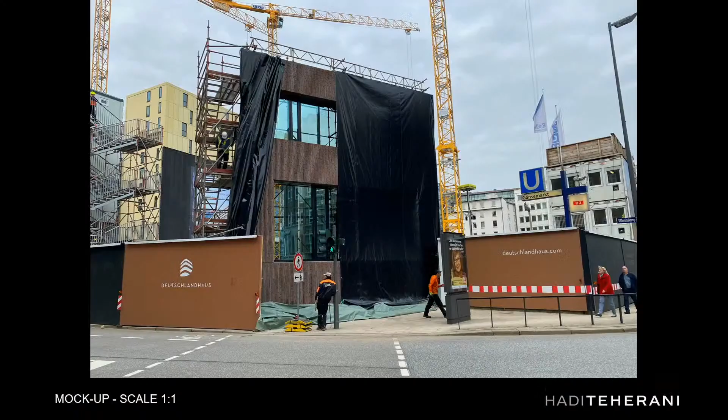In the end, it turned out that there is no rule in Germany where you're able to place those kinds of stones vertically on top of each other. None of the rules would have worked, so we went for a prefabricated concrete element, and we were placing the full bricks into the concrete elements. So it's not the thin ones, but real bricks.

This is a couple of examples, because we also didn't want the joints to be seen anywhere. So the vertical alignment is perfect when you want to go around the corners, and it's perfect to integrate all of the prefabricated concrete pieces and the joints in between.

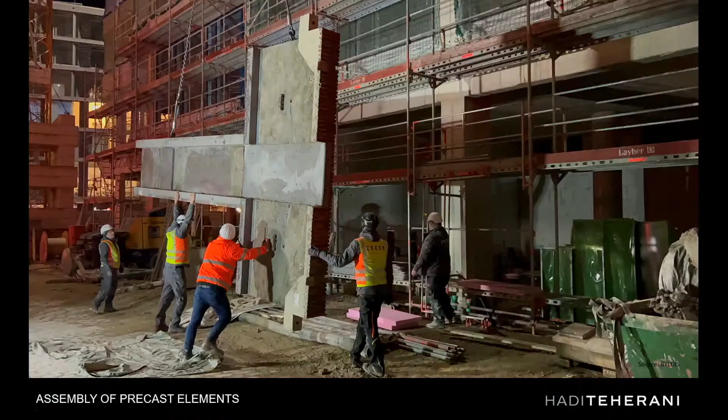Still, even though I was responsible for this project, I don't even see where they are right now, so they are really nicely integrated. We didn't go for linear elements, but in the end it's concrete elements which also take up the corner, or the junctions, let's say, the corners of the building.

And these are some images I recently got. I was so happy to see these images from our manufacturer of the prefabricated concrete elements.

They were building this layout where they placed the stones in, then simply pouring the concrete from the back. Because we wanted the sun and shadow to play nicely on the facade, we didn't want the mortar to be flush with the stones, but 20 millimeters further back so the handmade parts of the stones are nicely shown. These wooden elements are exactly 20 millimeters high, so when they took out the elements, the piece was already finished — no mortar on site in the end. What you see between the bricks is simply the concrete.

I brought a small movie, and then we're jumping to the second project. Just because the atrium, I think, is nice to see in 3D moving.

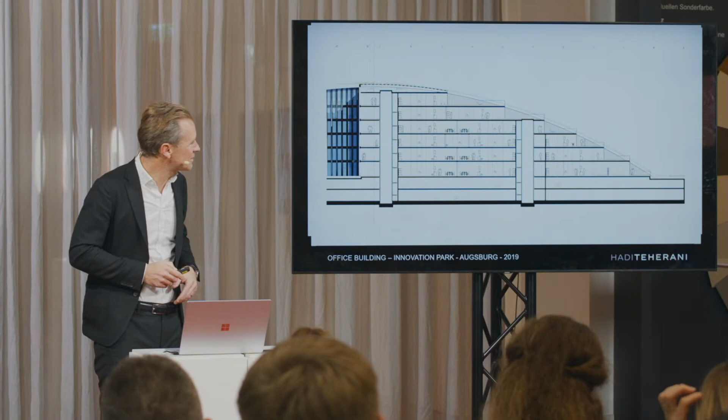So that's the section. None of the existing building codes were treated in a standard way by us — I think we had about 12 exemptions to get this through. But you see the quality created with the roof terraces integrated there. One of the reasons, at the climax of my talk, is that we not only used all kinds of technological aspects of a fully sustainable building, but it's also the first of its kind where we used an aluminum facade made out of 100% recycled aluminum.

So it's not waste from any factory, but really end-of-life aluminum. It used to be a can or another facade maybe, but the great thing is it doesn't have to look like it anymore. I'm a big fan of innovation in a way that we can design beautiful architecture but tell the story about the sustainability behind it. It doesn't need to look like it was made out of waste, but we have the industry and the technology, and we have to continue being innovative to do this in a fully holistic way.

You can also see that we wanted to create those verticals, giving the arc - I think you mentioned it nicely with the Bernabeu, how the sun hits the kinked elements. We did it in a vertical way, and we also integrated a second layer so it goes to a perfect point at the top and creates a triangle at the bottom. As you can imagine, if you want the perfect center on top but you're following the arc, you run into trouble because everything ends differently and you get millions of different pieces.

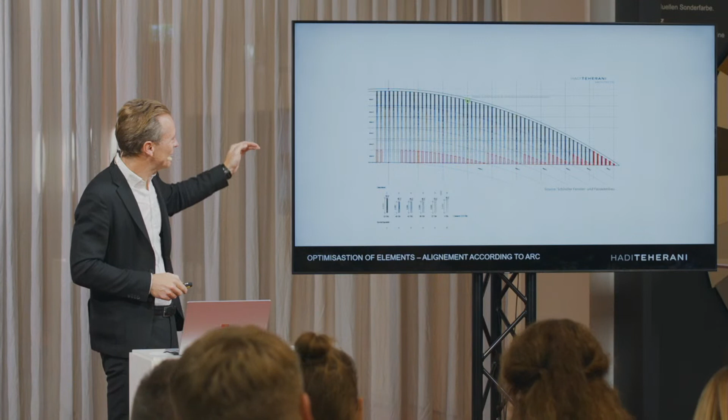So our initial idea, still very early, was that we might just follow the arc with the way the prefabricated elements would be mounted on the building. It turned out to be a nice idea - parts of it were taken up, but the manufacturer in the end had to use the horizontals for the subconstruction and to put the elements on top. We wanted almost all the same elements, but it wasn't a big issue in the end. It turned out to be 1,050 different elements per part to get this organized.